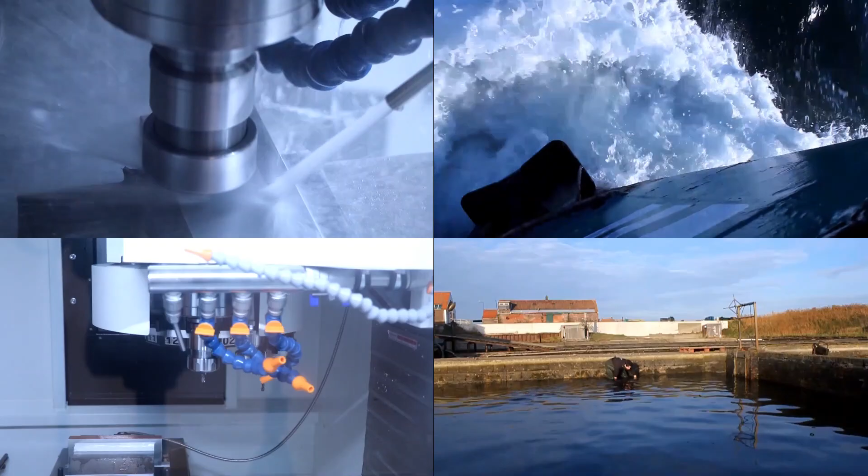So this case will mostly be made on my Workbee CNC router, which is a great little machine for the price. This one has a lot of upgrades, but the big downside is it has an old Windows laptop. So it has been doing updates because I'm spending all my time on the Syil X7. Yeah, well, it happens. So, nice test for my new microphone.

What we're doing now is we're flattening the spoil board. We moved the machine over. It's on wheels, which is awesome, but it also means that the frame has moved a bit. So we now need to get the table straight again, and that's what we're doing by removing the top layer, making everything parallel to the spindle.

So with the spoil board flattened, I'll fixture the piece. For this, I'm using tape and glue. Why? You can do it in all kinds of different ways, with clamps, with window machining, but with the tape and glue you have enough holding power and you have zero work at the end. When you remove the material, you don't have to sand any tabs or something like that. It's amazing. It is a bit more time in the setup, but I find that you'll win it back later.

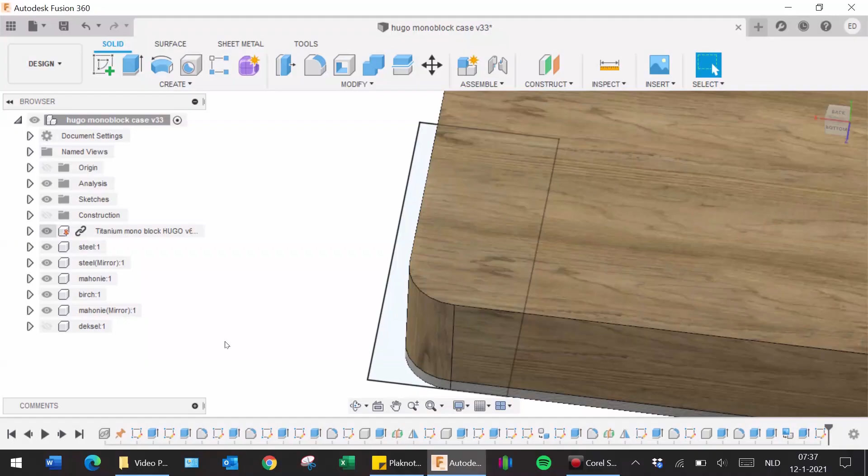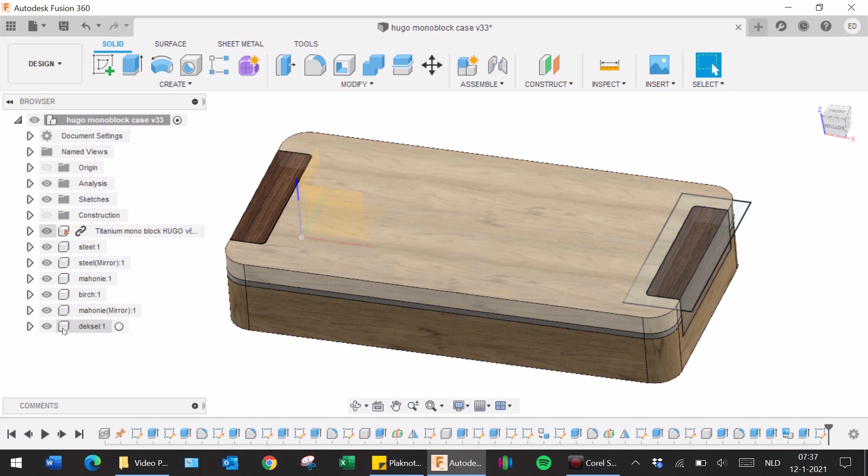So if we want to show in this video what we're actually going to make, it might be nice to show you the design. So this is the case with the cover on. Here we'll have lots of space for engraving logos, my own logo, but also for companies who want to buy and sell this knife, like restaurants. And here we will have the case itself with steel strips so that the cover can magnetically click into place.

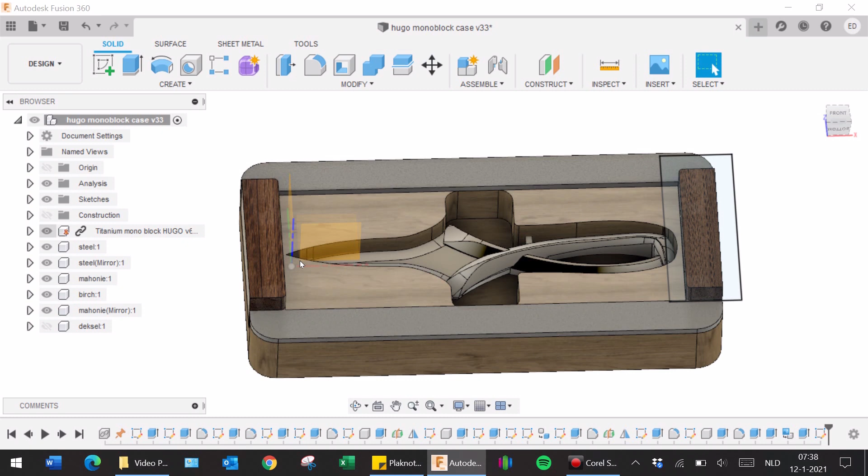The thing is, the whole subsidized project that I'm doing right now, in order to get the government money, it has to be circular. So that means no glues, no varnishes, nothing. So I devised a rather nice way of holding down that steel strip.

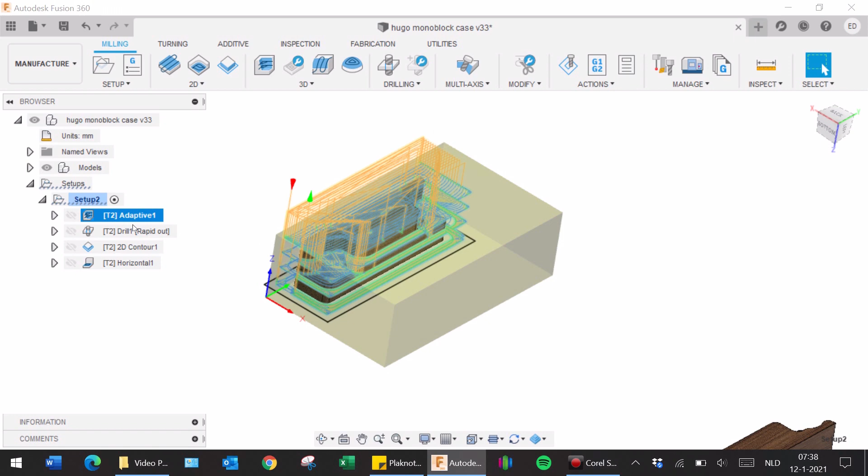And the first part we're going to make are these really small end pieces, I suppose. So this is what we're going to make first on the Workbee. So I have an adaptive, drilling the holes, and then a contour plus a horizontal to clean everything up, and hopefully that will be fine. So when you're CNC milling with the mill, you don't see anything because of the whiteout, because of all the coolant that's spraying. But with a CNC router, you're not seeing much either.

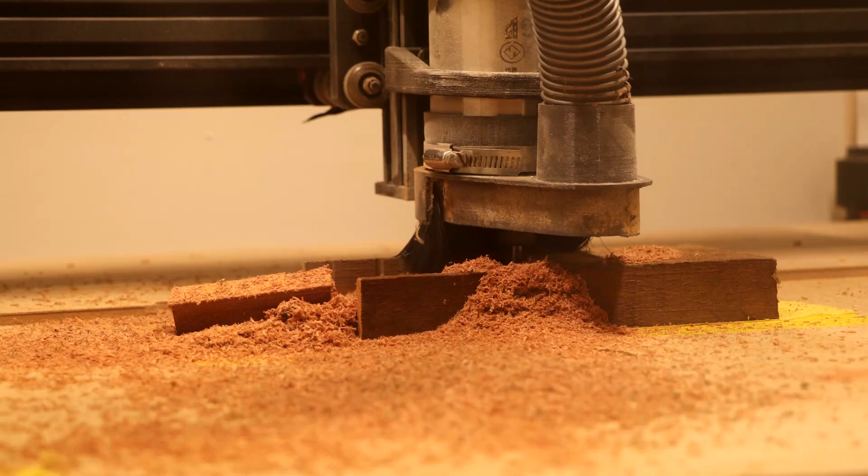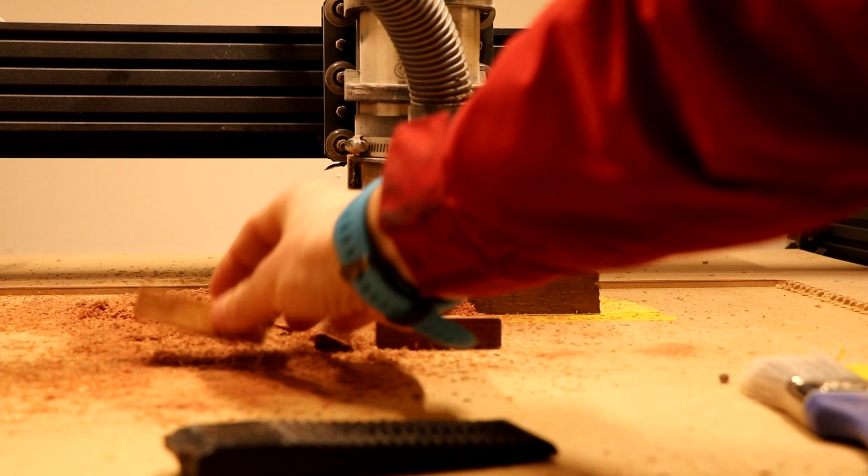Okay, I can't really say this was a success. I was with my big mouth saying that tape and glue is never ever a problem. Well, today it apparently is. So I had 3 pieces come loose. It's not so much in the holding method, it's more in the code. So I have to finish everything and then I have to remove the final tabs at the bottom. And now I removed them too early, and then I was doing some horizontal passes on top. So yeah, more holding strength by keeping it in the wood, and then at the very last moment removing some tabs. So let's try this again.

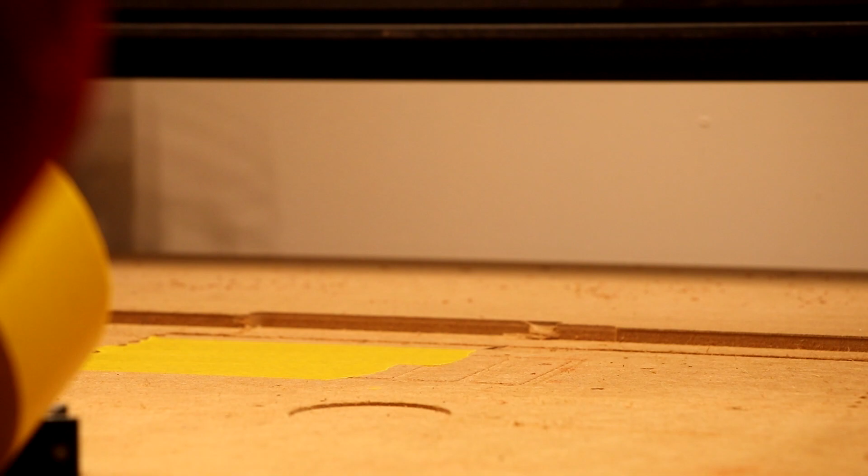This time I faced this surface because I saw that it was not even, so that also doesn't help when you're trying to glue down stuff. And I'm gonna use more glue, because more glue is always better, right? In its final passes, and I really hope that it doesn't fling away the piece. It didn't. Success. Yeah, that's definitely a lot better attached. Part better as well, because I sanded it here.

Great. So this is my wood supply, and I have quite a lot of it. So I won't be running out of wood shortly. What I am running short on is a planer. I had one in my old workshop. Well, it was in the workshop and I was allowed to use it. I don't have it around here, so we have to tinker around a bit until we have the funds to buy one. They're expensive. But this is going to be the main body of the case.

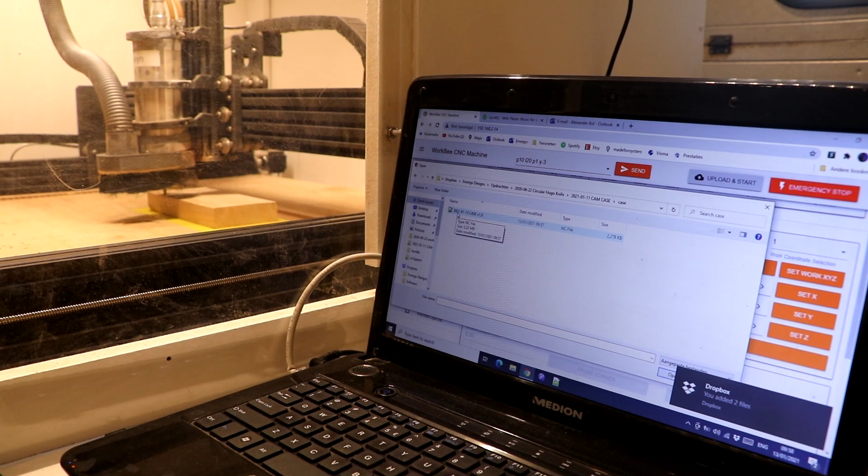See, that's more like it. So I just put in the block. Code is now on the laptop, thanks to Dropbox. So if I now double click, it should run. It takes around an hour. Okay, so let's see what we've milled. Not too bad. Have to sand a bit more, but we'll get there.

So it's now milling the cover, and it's actually flattening it as well. So that means I don't have to do this by hand or by sanding, but I really need some more wood flattening material.

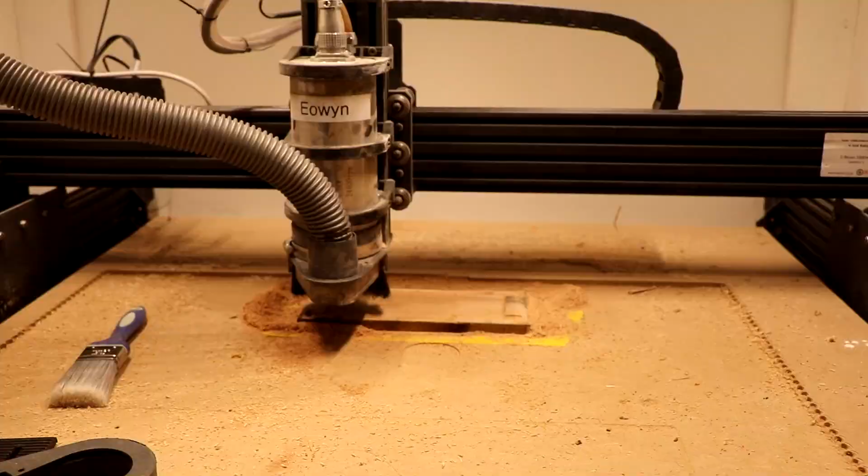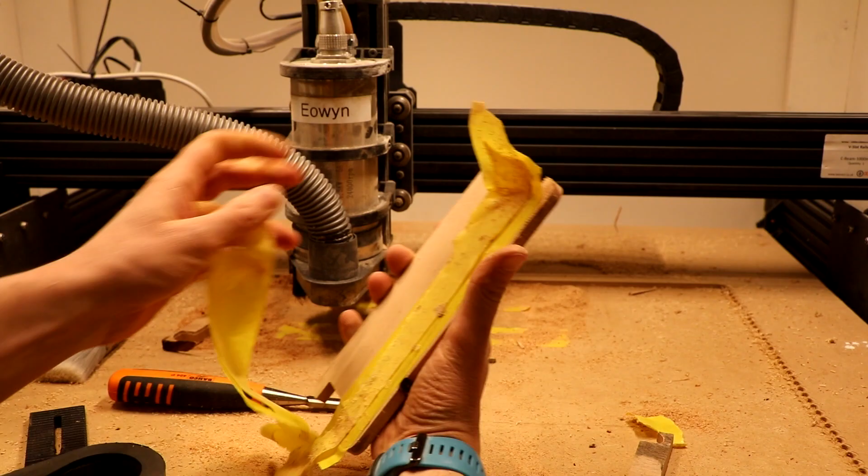Okay, so we've been making parts all week, and it's time to show you people what we've actually been making. So this is the knife, it goes in like this. These are steel parts that I just received, and they will be used for magnetic clamping as well as for a certain aesthetic and look.

These are dowel pins, and they will be pushed in here at a later stage. These are the first parts we made, the decorative end pieces. Here we have a cover where we will screw in some magnets, and this will go like this. And we have a beautiful, nice case. Here it's going to be a beautiful laser engraving, but first I need to sand everything flat and sand away these tool marks. So yeah, it's coming together very nicely.

That's why the knife is completely made out of titanium, a solid block of titanium, because I'm going to send the knife away, and if the customer is tired of it and doesn't want it anymore, he can ship it back and we'll recycle it for them. The same with the case. If you want to use magnets, which I want to use because I did the paper wrapper a couple of times now, I want something different.

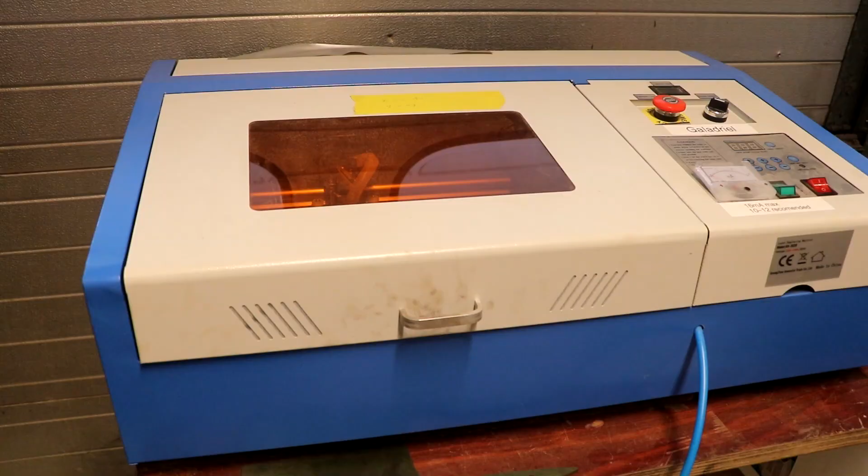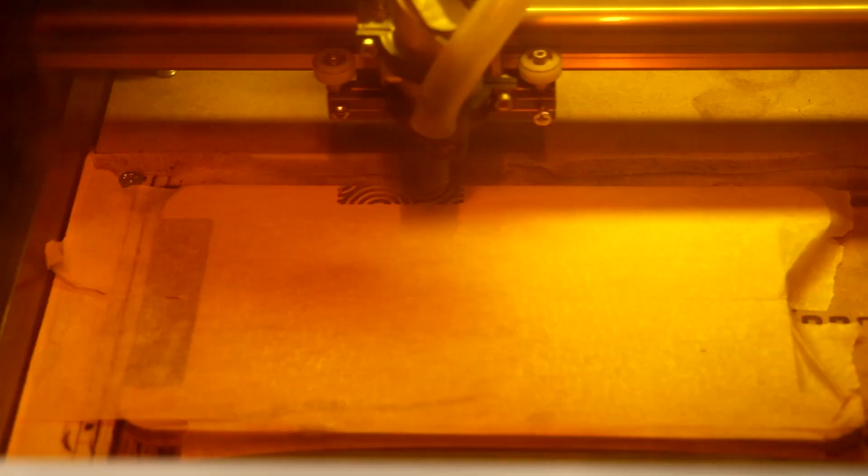So now that everything is flush, we're going to play with one more machine, which is the K40 laser. This is a very hobbyistic machine compared to this one, but it does its job usually very well. So do a test laser first, and then do a nice pattern. The SD card ran out of memory, which is a shame, but I think that's looking really, really nice.

Nice coat of oil on there, and that's absolutely gorgeous. Even though we'll reject this one because this is here and this knot is here. But just look at the pattern. I think it's a really nice case for a knife like this.

So this is the prototype of the Oyster knife case. And I'd like to say, who doesn't like to receive a knife in a case like this? So we have this beautiful engraving, I think it worked out really well. This was a different color in the vector, so I need to change that so it's the same intensity.

But I'm really happy with this engraving. I need to change some things in the geometry here to make sure that it always fits, and also this would have been reject. So this is good enough for my personal case, but not good enough for a customer. But if we open it up, we have the magnets in here. We already drilled with the router the holes inside, and we just had to screw it down. It was super easy. I'll put this aside, but within view.

Here we have the actual knife inside the case. So the knife is from episode 2, and it fits really nicely. And I have some space here for documentation and manual stuff like that.